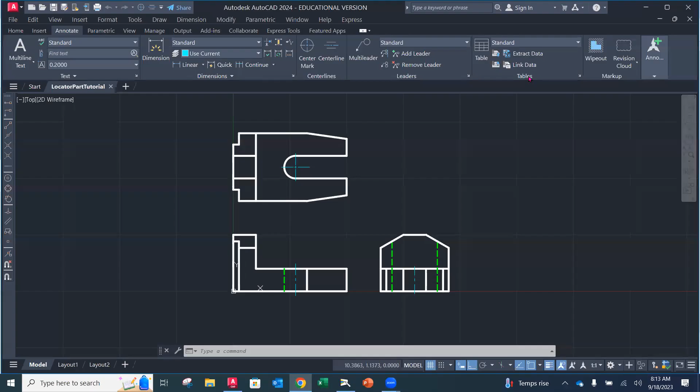So to download them, you're simply going to use this downward arrow. And then you're going to notice that it's going to go up to your downloads folder. There's a little icon here now. So instead of navigating all the way to the folder, you can do that downward arrow and you can simply click on the WCTC_A, ignore unresolved. When you do that, this is going to be the border that we have. So you'll notice that it looks kind of official, okay?

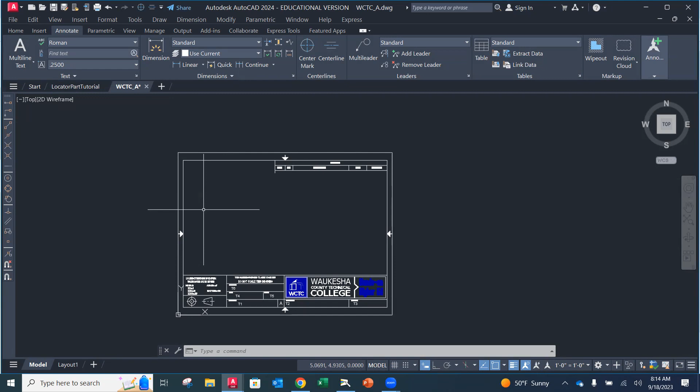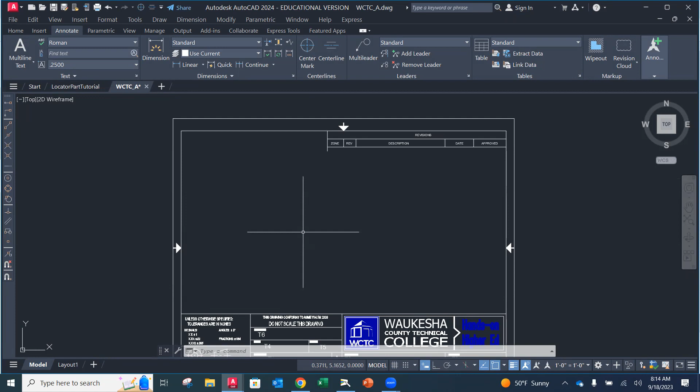And let's talk about our drawing border so that we understand the purpose for it and what's all here. So number 1, this means that within the confines of this area right here, the blank area on the inside, this is where all of your drawing and dimensions have to occur. They cannot go outside or go beyond any portion of the inside of that border. Okay. All of it has to be within the open space. No exceptions. If anything is overlapping or too far out, you need to move it so that it can be within.

Now, as we look at the components of our title block, we're going to notice some things that are probably familiar to us. First and foremost, you're going to notice that down here is, if you would, the company. You guys are drawing in school here, so this is WCTC's logo and their tagline here, right? So what that does in the case of a company is it says, this is our property, okay? And a lot of times there's even a statement saying that exclusively this is the property of and only for the purposes of our company. This is ours, because it's actually owned by the company for whoever you end up working for.

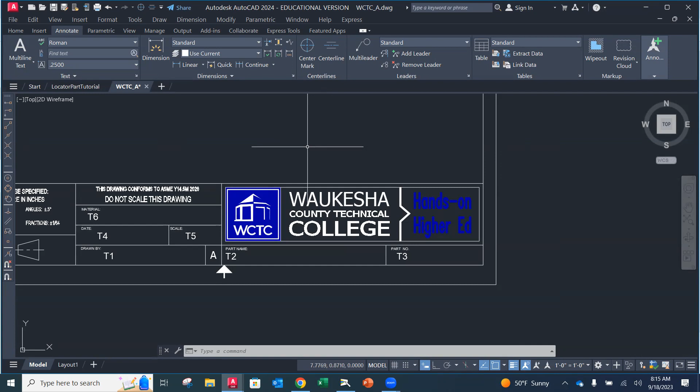In the case of WCTC, it means that you are doing this for educational purposes. So obviously, and we've talked about this, using software that is the education version, you cannot make a profit from it, okay? So we're practicing, we're gaining a skill in using CAD.

Now, additionally, you're going to notice that there's these other fields that are here. First of all, there's a part number field. Right now, it's populated with this T3. And that's because when we pull the border in later on, you're going to find out there's a little bit of automation in the background. It's called a macro. And in that automation, you're going to be able to fill in the material, the date, the scale, the drawn by, your initials or name, the part name and the part number. Okay.

So when I pull this up right now, I don't fill it in, but when I pull it into a drawing later on, as a block, we're going to insert it, then that field is going to come up and I can automatically put it in and it populates this for me really nicely. Okay. So that's what the T numbers are.

Additionally, you're going to see the letter A here. This letter A just signifies it's an A size drawing. Up here, it says this drawing conforms to the ASME Y14.5M 2028 and, oops, that's supposed to say 2018 standard. I will get that updated, but for right now, we'll go with it. And all that means is we are using the dimensioning standard for everything that's on this drawing, so that we are in conformance.

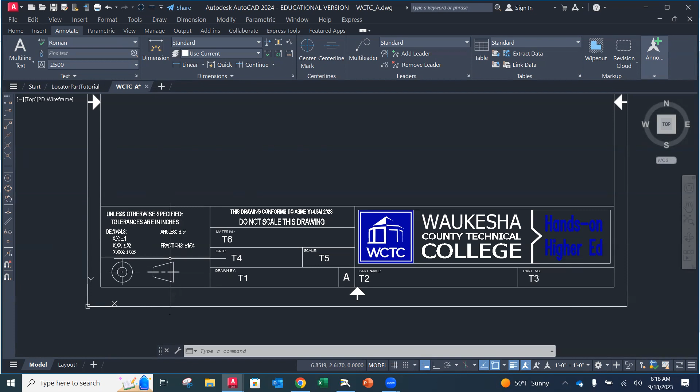Over on the left-hand side here, these are going to be our standard tolerances. So it says here, unless otherwise specified, the tolerances are going to be in inches. So that tells us right away that the units that we are using for all of the dimensioning on the part are going to be in inches. And if there is not a tolerance next to the dimension, and this again will make a little bit more sense as we talk on Wednesday, we are going to use this scheme right here. These are called title block tolerances.

So if I have a 1 place decimal, for instance, the standard tolerance is going to be plus or minus 0.1. All that means is whatever that number is, that's the nominal value. And now we're going to add 0.1 or 1/10 of an inch above and 1/10 of an inch below. And now this is the range that it has to be made within. Okay, that's what a tolerance is in simplistic form. Then we have the same thing for 2 place decimals, the same thing for 3 place decimals.

What we're going to be doing in starting this process of getting dimensions on our drawings is we're just going to pick, okay, all of our dimensions are going to be 2 place for this drawing. So we're not going to worry so much about it. But the important thing here is that every title block has this information on it. And you need to check it and know it, especially if you're designing, because you have to know if I don't put a tolerance on that, it's going to default to whatever is here in the title block. So every dimension essentially does have a tolerance.

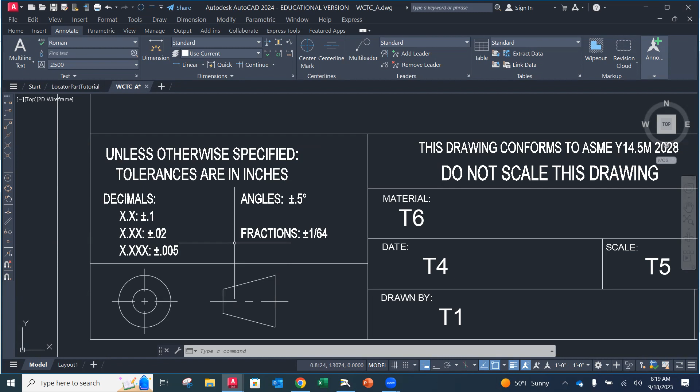And if you need it to be something other than that, then we have to specify it. And we'll learn in AutoCAD how to do that. But for right now, we're going to keep it simple. Additionally, our tolerance is plus or minus 1/2 degree on any one of our angles. And then if it's a fractional dimension, which there shouldn't be many out there, but sometimes they creep in, it's going to be plus or minus 1/64 of an inch.

You'll also notice down here, we have this symbol. Do you guys remember what this symbol was? It was a long time ago, like 4 weeks ago. Any idea? What was that?

No. Not the center. Oh, James raised his hand. I'll be there in just a second. Oh, he's probably raising his hand because he knows what it is.

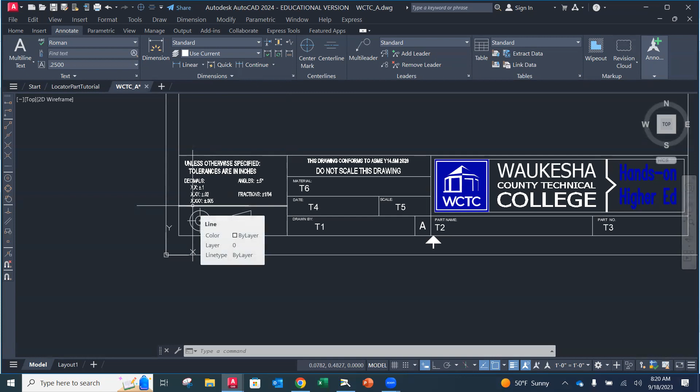What is it, James? Is it first view or third view? Third angle projection. Yes. So remember, there was first angle projection and there's third angle projection. Third angle projection is the United States, right? And so that's where I said, I think we got this one right. The first angle projection is kind of wonky and backwards.

So what this says is we are doing this in third angle projection. So as we project across, it's the edges that we see closest to us in our views. Okay. So this is the standard symbol for that. And so that has to be on a drawing identifying exactly what projection that is.

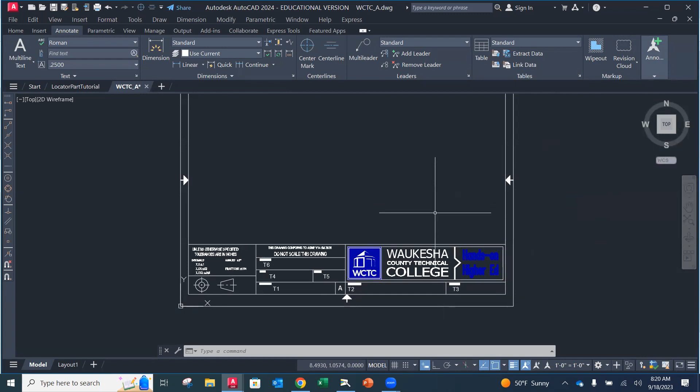Now, additionally, you're going to notice that up in the upper right-hand corner here, we have a place to put revisions. We won't see this very much, actually probably at all in this class. This is when we do make revisions. And at a company level, we need documentation of that so that they have kind of like breadcrumbs, like, why did you do that? And that way, if it affects other things, we know why and the date and who approved it and all that kind of stuff.

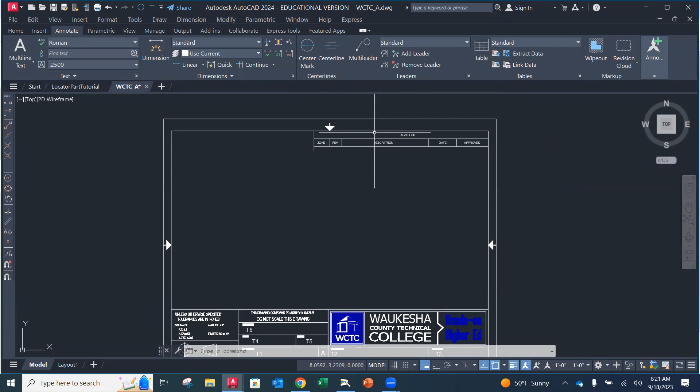Okay. So this is our standard title block. This is an A size inch title block. So if we go back to our module, you're going to notice that there's a B size title block as well. I'm going to open that one up. We're going to look at that. Oopsie. I'm going to download it. Sorry. And we're going to notice that the title block is exactly the same.

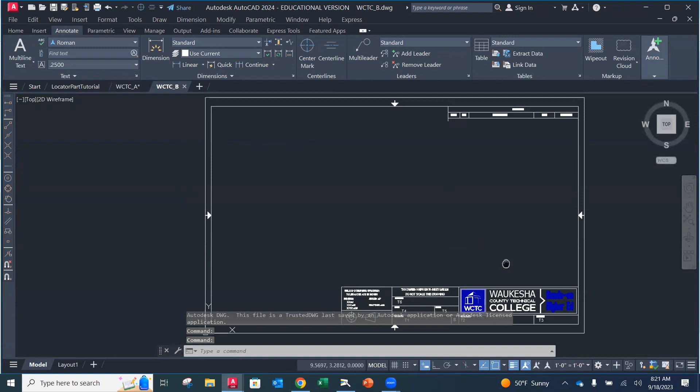By design. Every company is going to have the same title block, but now just notice that the B size, by the nature of how much larger it is, I've got more space to draw in. And that's really the only difference here. And then there's also C size, D size. We won't need those, especially in the immediate future. As time goes by, if we have larger drawings, we might put those in here, but A and B size drawings should do what we need to do.

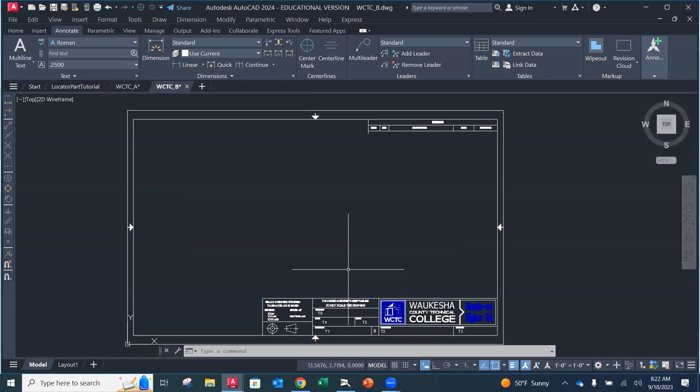Now you'll notice that down here in the title block, again, exact same information, and also the ability to fill it in automatically. But this time we have a B in the drawing size spot. Now, if we do that very same thing and we look at the metric, I'm just going to pull up the A size. So A4, I equate it to the A size, but it's the metric version of an 8.5 by 11.

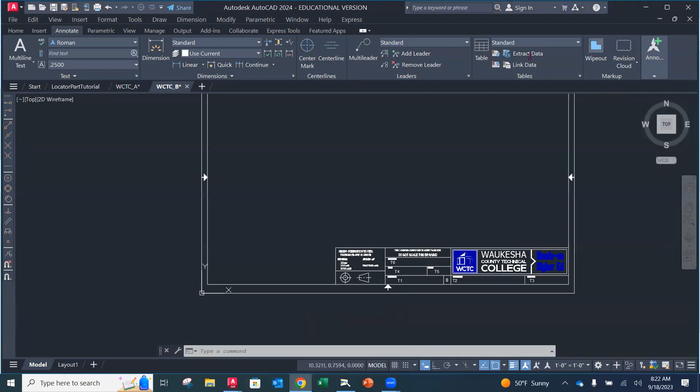Ignore the unresolved. The only difference that we see down here is everything else in the title block is consistent, but now it says that our tolerances are in millimeters. And now we have different standard tolerances. So when we don't have any decimals on millimeters, which is very common because millimeters are pretty darn small to begin with, standard tolerance is going to be plus or minus 1 millimeter. And if it's one decimal place, it's plus or minus 0.1 millimeters.

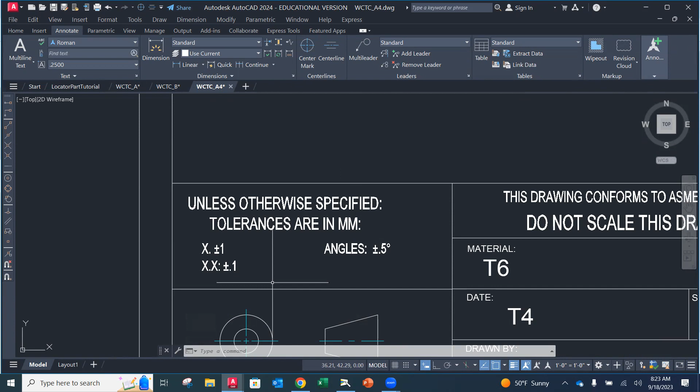The angles are the same. And so if there's any other decimals that are used, or you don't want to use these tolerances or they don't apply, then you have to specify them up in the actual drawing by the dimension. Okay. So really the very same title block. So any questions about title blocks?

Right. So the thing I want you to do with these right now is get them downloaded somewhere where you can reference them, and we're going to be pulling them in as what we call blocks. We're going to be inserting them into our drawings once we have the multi-view drawings created, the views that we want. We're going to be pulling the border in and putting it around. It's kind of like an after. We're going to get everything drawn first, and then we're going to pull our border in.